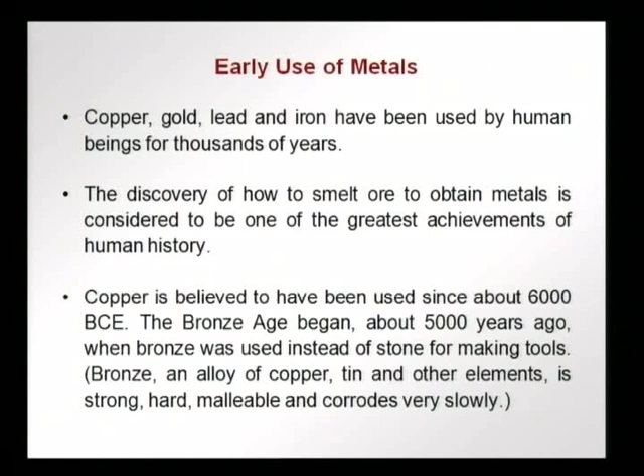Iron has been used since 4000 BCE, and we can say that the Iron Age even continues today with the widespread usage of iron and steel, and today we will see why iron and steel are so popular as construction materials and why they continue to be used. It is said that high quality steel was produced in South India perhaps as early as 300 BCE.

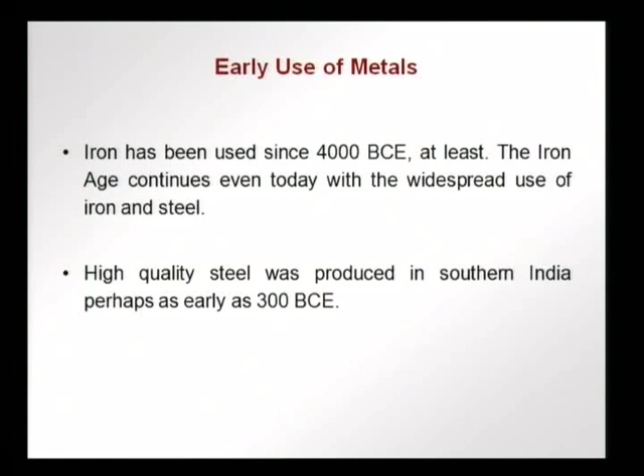Most metals are found in nature as ores, oxides, sulfides, carbonates, and though the extraction of the metal from the ore is based on simple chemistry, the problem is to do it on a large scale, on the industrial scale.

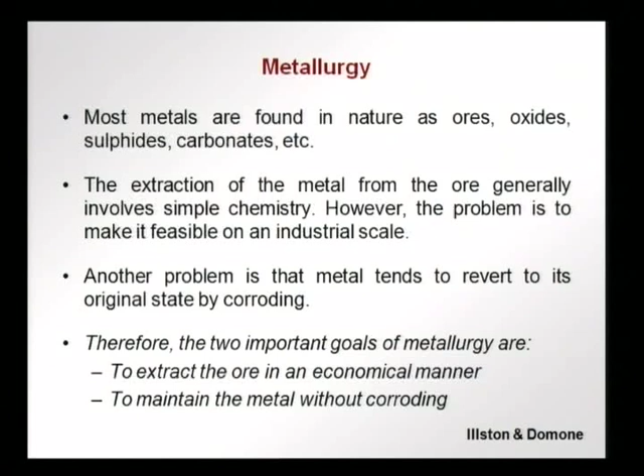Another problem with the usage of metals is that the metal tends to revert to its original state by corroding, that is, it becomes an oxide or tends to become an oxide. Therefore, in metallurgy the two important goals are how to extract the ore in an economical manner and how to maintain the metal without corroding, and the product of this is what we use in civil engineering applications.

This is a brief introduction to how metals are formed, common processing methods.

We have the melt, the molten metal, and this can be cast as an ingot, as a bulk piece of metal that can be worked on, shaped later, or it can be put directly into the shape that we want through sand casting where the mold is of sand, or some other material, or investment casting where we use a disposable mold.

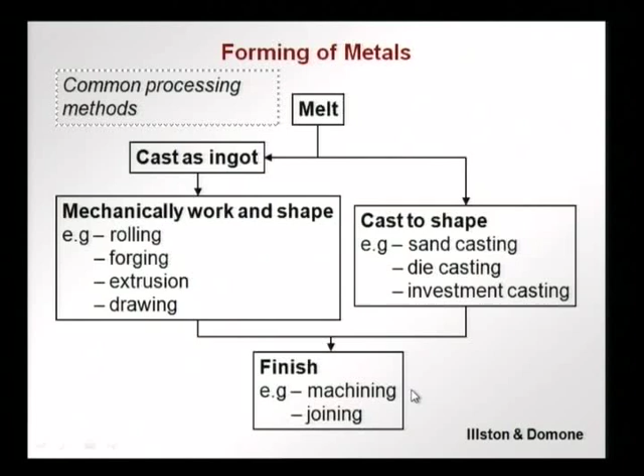This is also called lost wax casting and so on, where we use a die or a cast which is destroyed during the casting. Then the ingots can be worked and shaped through rolling, forging, extrusion, drawing. We will see this in more detail in a minute, and then there is a lot of finishing involved in terms of machining and joining of the different elements.

For forming, we use different processes related to hot working. The hot working processes depend on the plasticity, which is higher at higher temperatures, and this is done above the recrystallization temperature, so that when cooling occurs we do not have any residual stresses.

And these processes allow metals to be deformed in compression without breaking the metal. And on the right we see different processes involved. This is rolling. This is very commonly used to get sections, where a larger piece of the metal is pulled through rollers to get the desired shape and section.

The pulling through can also be done without rollers, using a die in the case of drawing wires and thin products. This drawing can be aided by a ram pushing the material through instead of just pulling through a die, and this is called extrusion. Then there is the possibility of applying force to create a certain section.

For example, in forging, force is used to give the material a certain section or shape. Deep drawing, again the material is clamped and there is a negative piece which gives the shape pushed against the metal to give the required shape, say to form a cup shaped element and so on.

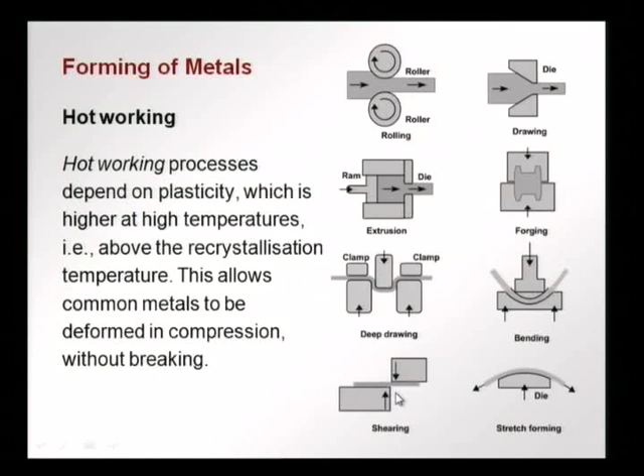For steel structural members, the usual method of forming is hot rolling with cylindrical or shaped rollers at temperatures of 1000 degrees or more. We use the higher temperatures so that recrystallization occurs and there are no residual stresses.

After rolling, the members are allowed to cool naturally, ending up with an annealed microstructure. We discussed annealing in detail when looking at strain hardening, and after annealing the material will not have residual stresses and will have a stable microstructure.

The cooling of the material to ambient temperature also involves the formation of an oxide film on the surface. When the material is hot, an oxide film forms and remains on the metal, and this generally helps the metal in terms of corrosion. The oxide can prevent further corrosion and stays on the surface.

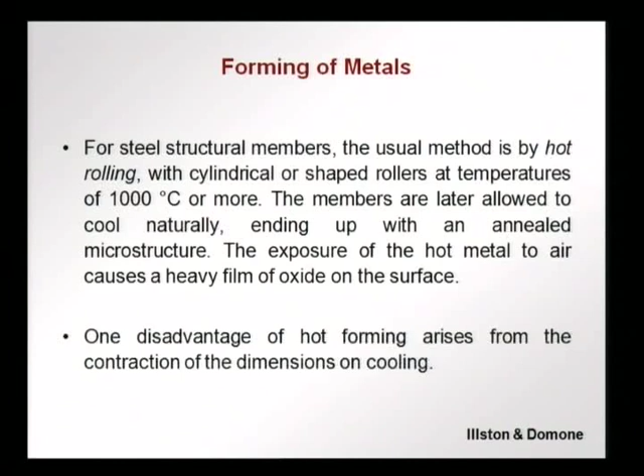Metals and alloys can also be cold worked. We have discussed the advantages and disadvantages of cold working in previous lectures. Here the metal is worked at temperatures below that of recrystallization, and there is not much change in the microstructure.

Many metals and alloys can be cold worked, that is shaped at temperatures below recrystallization, and this gives rise to strain hardening and an increase in tensile and yield strengths. This, however, as we saw in previous lectures, leads to a decrease in the ductility or elongation.

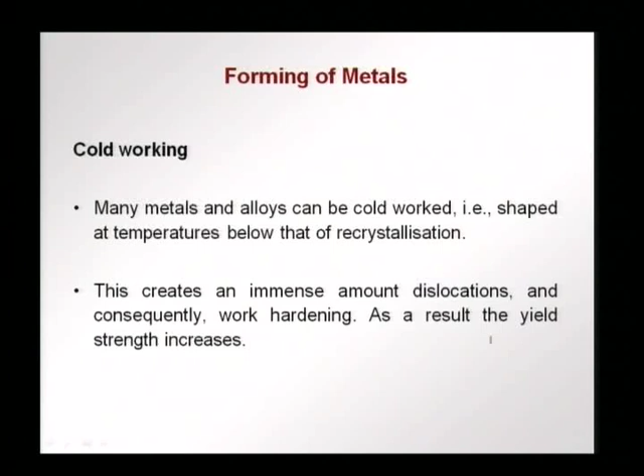This is caused by dislocation movement, and the dislocations result in piling up, with hindrances due to the grain boundaries causing work hardening. The consequence is that we now have a metal with a higher yield strength.

There are many cold working processes. Cold rolling, done at room temperature, is used to decrease dimensions, and this results in sheets that have higher yield strengths than the parent material.

Wires are also drawn at room temperature. This is called cold drawing. High strength wires are obtained, and fibers that are used in concrete are made with such processes.

Cold extrusion is also possible, similar to what we had in hot working. Extrusion can also be done in cold working, again leading to strain hardening and increase in the strengths.

There is, however, a limit to cold working. Beyond a certain limit, the ductility of the material is completely exhausted and the material fractures in the process of cold working. So we should understand the stress strain behavior in order to know how much to push the material into the strain hardening extremes.

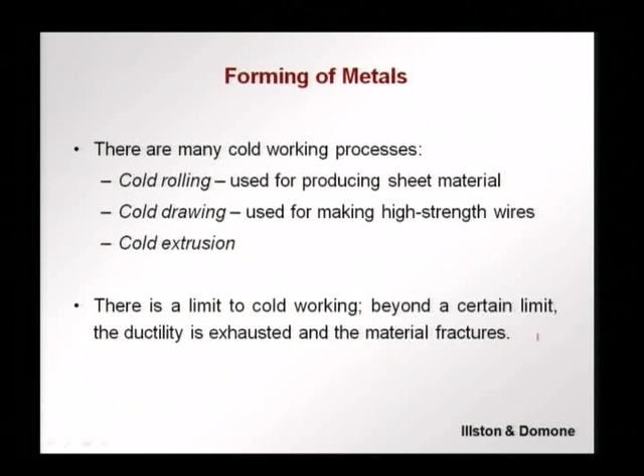There is a change in the microstructure of the materials also during cold working, depending on the process involved. Suppose we have cold working due to rolling, a polycrystalline material before rolling would have a microstructure with equiaxed grains, that is grains with similar dimensions in all directions.

However, if rolling is done, we now have elongated crystals, elongated in the direction of the rolling, and this microstructure remains after the cold working. The material changes from being isotropic to now anisotropic.

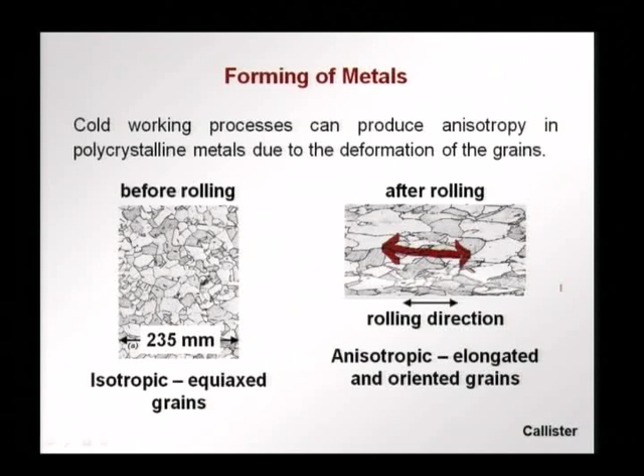Different pieces of metals also have to be joined before application, and there are several processes involved in joining metals. Adhesive bonding is where a substance like a glue is used to bond different pieces. This is being used increasingly, but is not very common.

Diffusion bonding is a solid state process we discussed earlier, where two pieces of metal are pushed together, temperature is applied, diffusion across the element boundaries occurs, and we have a case of an alloy forming near the bonded region, which sticks the elements together.

A common process of joining metals is welding, where the material is locally heated above the melting temperature, and the material fuses. Additional material can also be added, say a metal used to finish off the welding. The joint is then allowed to cool naturally.

This should be done such that there is complete continuity between the parts. This is often not achieved, and if not properly achieved, there could be defects which could lead to fracture and failure at the joint.

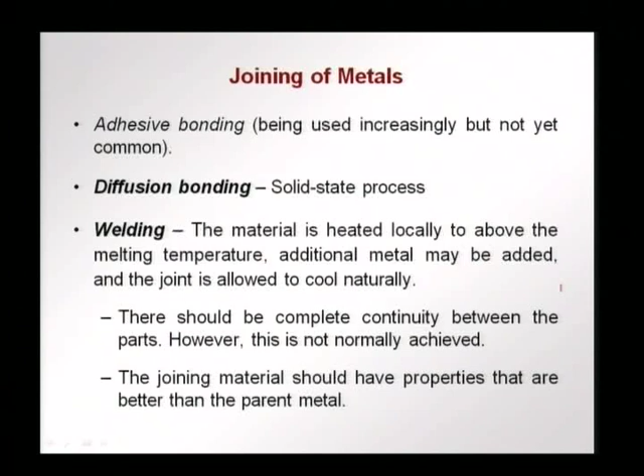The joining material, if an additional material is used, should have properties that are better than the parent material. Otherwise this would be the weak link and failure would occur again at the joint.

Brazing and soldering are similar to welding, but the temperature is lower than the melting temperature of the parent metal. This involves joining parts by means of a thin film of filler material. The temperature is lower than that of the parent material, however it is high enough for the filler material to melt. This flows into the joint and wets the joint through capillary action.

Remember, we talked about wetting when we discussed surface properties. The filler material should melt at a reasonably appropriate temperature, and when in the molten state, wet the joint by capillary action, then solidify with properties comparable to the parent metal. In soldering, the filler material melts at much lower temperatures than brazing filler materials, less than 450 degrees Celsius.

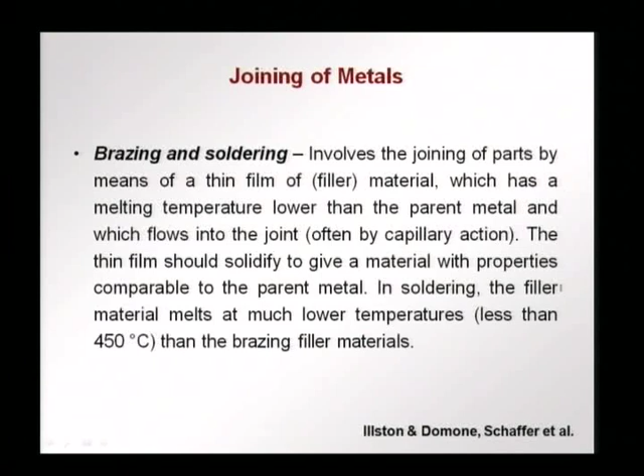One of the problems of using metals in applications is that metals tend to revert to their original state found in nature through oxidation. Oxidation and corrosion are very big problems in civil engineering, because this can hamper the life of the structure made out of metal. Corrosion can be divided into two parts: dry oxidation and wet corrosion.

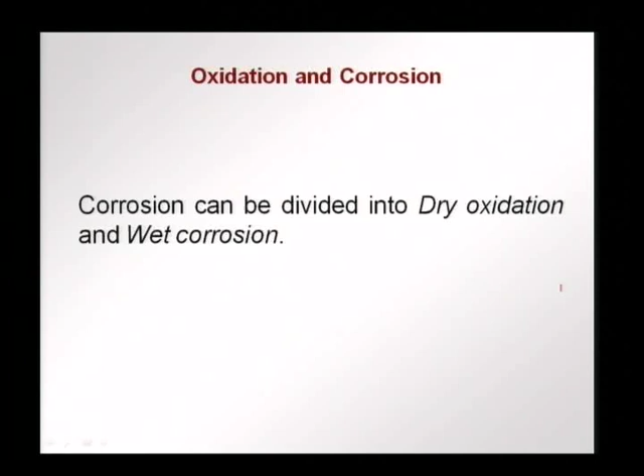All metals, as we discussed earlier, occur in nature in the oxidized state except for gold and silver. When a metal is exposed to the atmosphere, a thin layer of oxide first forms on the metal surface. Further oxidation depends on what can diffuse through this oxide layer - either metal ions should diffuse out through this first layer of oxide, or oxygen ions should diffuse in for oxidation to continue.

The rate of oxidation therefore depends on the thickness and structure of the oxide layer. If it is thicker, oxidation will be slower, and if the structure is very impermeable, not letting anything in or out, then again the rate of oxidation is lower.

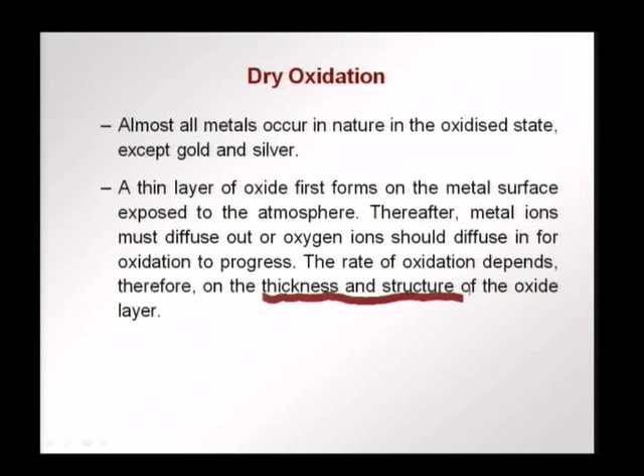When the oxide that forms has less volume than the metal itself, it shrinks and cracks. This exposes the fresh metal to oxygen, and further oxidation can continue to occur. Sometimes the oxide occupies more volume than the metal from which it formed, and then it will delaminate, stretch, wrinkle and fall off, again exposing fresh metal by creating a new surface.

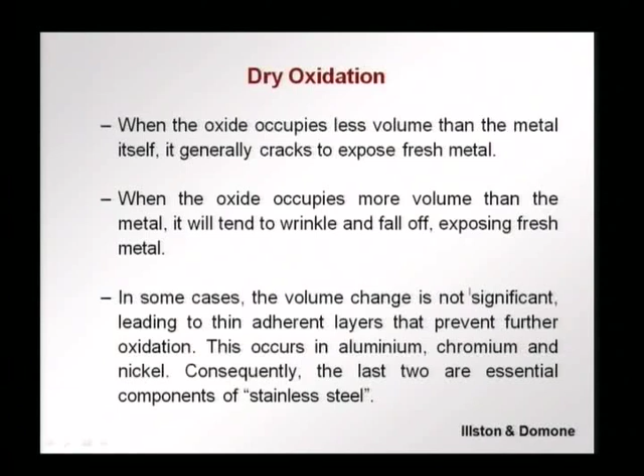In some metals, however, the volume does not change that much. This leads to thin adherent layers that stick on the original metal, preventing further oxidation. Such oxide layers form in aluminum, chromium and nickel, and this is the reason why chromium and nickel are used to make stainless steel.

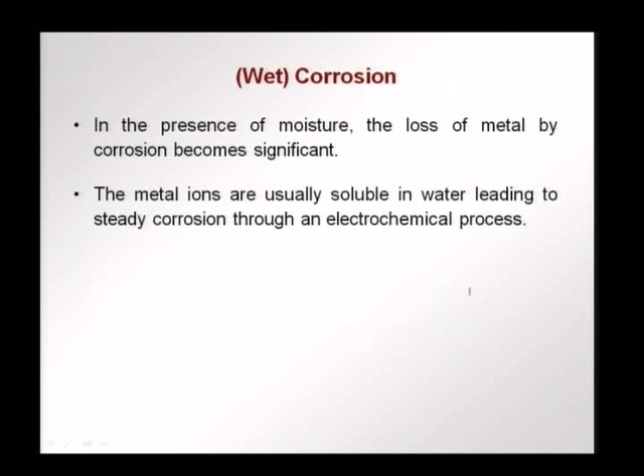In the presence of water and moisture, this corrosion process gets even worse. The loss of metal becomes more significant when we have moisture and water. Metal ions dissolve in water, leading to steady corrosion, and this occurs through an electrochemical process that we will discuss further in the following slides.

Let us consider a divalent metal M, with a valency of 2. What happens when you have an electrolyte and there is enough oxygen and water available? First, the metal releases electrons - this is the oxidation reaction or the anodic reaction. Then hydroxyl ions form from the oxygen and water - this is the reduction reaction.

So first we have an oxidation or anodic reaction producing electrons. Secondly, there is a reduction or cathodic reaction consuming these free electrons. These two are called half cell reactions. This occurs whenever a metal is exposed to both oxygen and moisture.

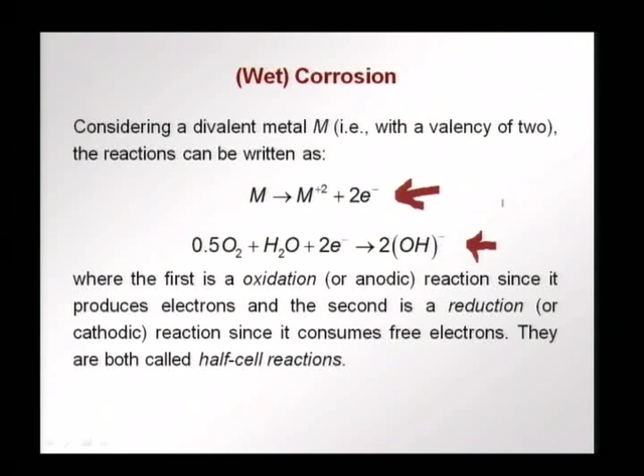In some cases, the metal ions react with the electrolyte and deposit away from the cathode. Iron is one which corrodes that way, and this involves two reactions. At the anode, iron releases electrons, which can result in a cation with a valency of 2 or 3.

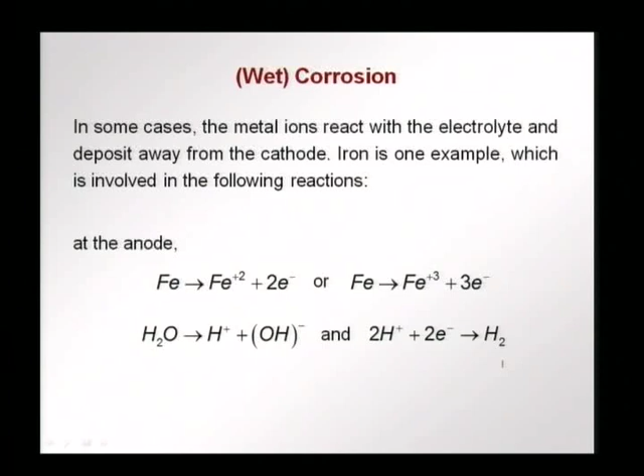Water splits up into hydrogen and hydroxyl ions, hydrogen is released, and at the cathode the iron ions react with the hydroxyl ions giving iron hydroxide, FeOH2 or FeOH3. This is what you would notice sometimes as an orange slimy substance found near iron that is submerged in water - you will see some orange liquid near the surface of the iron. That is iron hydroxide.

This is later converted to iron oxide and water as the water evaporates and the material dries. You have rust forming on the surface, that is iron oxide.

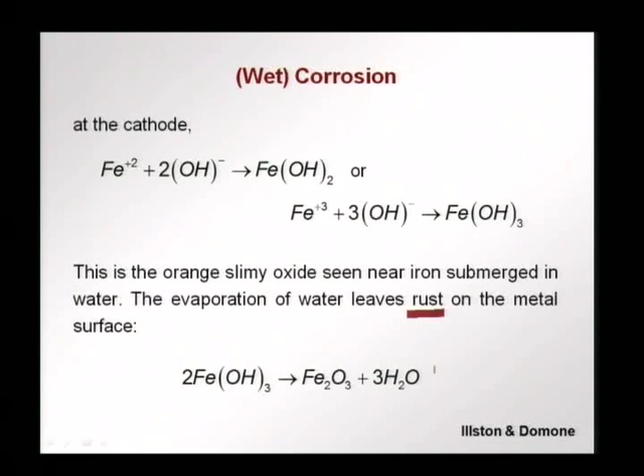This is a diagram showing the different reactions that we have discussed. We have an anodic reaction that is now causing the loss of material. Iron ions now dissolve in the electrolyte, there is a release of electrons, and at the cathode we have hydroxyl ions being produced.

Oxygen and water are required for this cathodic reaction. This now results in depletion of material at the anode. The material starts to be removed at the anode and deposited elsewhere, say near the cathode.

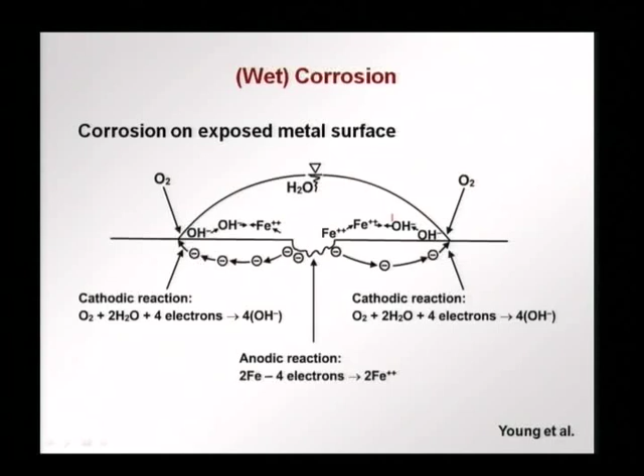Corrosion can also occur when two dissimilar metals are in electrical contact. Electrical contact does not necessarily mean that they are touching each other, but they could have an electrolyte connecting them. Say here we have a piece of iron and a piece of copper in a bath which could be water with some impurities or some salt solution.

So what happens now is that the copper electrode becomes a cathode, the iron electrode becomes an anode. So the iron piece starts losing material, iron ions now go into solution, and we have a cell formed between the iron and the copper pieces, and this is called a galvanic cell. This is very important because in many applications we have dissimilar metals in contact, and this could mean that one of them will preferentially corrode because of this galvanic cell.

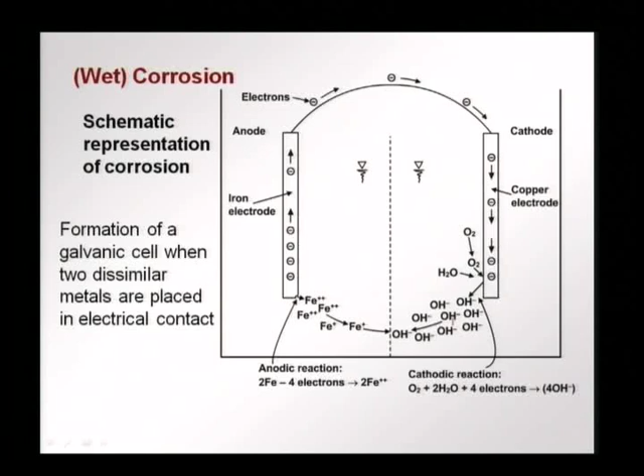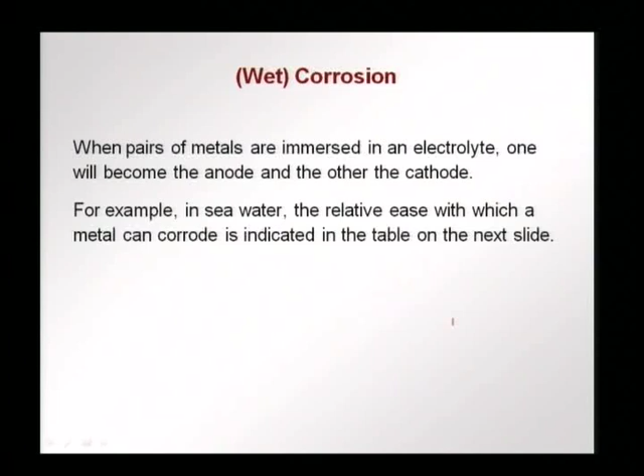So when pairs of metals are immersed in an electrolyte, wherever there is some sort of solution, one will become the anode and the other will become the cathode, and the anode will corrode. We look at the example of metals in seawater, and we can make a table which shows which will corrode more with respect to another. This is called the galvanic series.

Later on we will see that this is used to create sacrificial anodes when we want to protect steel, say mild steel, from corroding. If we have a piece of magnesium with it, then the magnesium or zinc would corrode rather than the mild steel. We also find that in an alloy, say in brass, when we have more zinc, the corrosion potential is more than in brass which has less zinc.

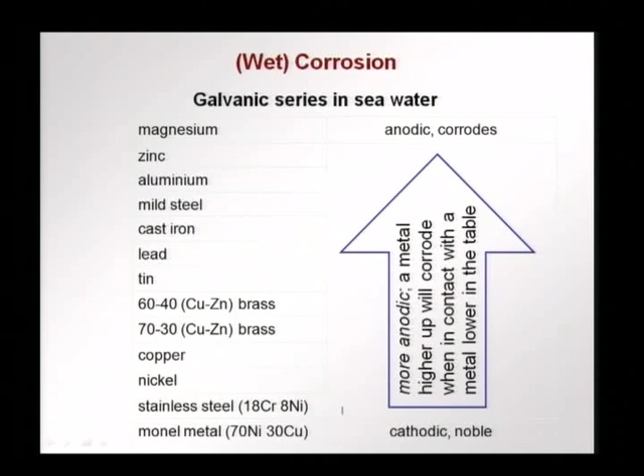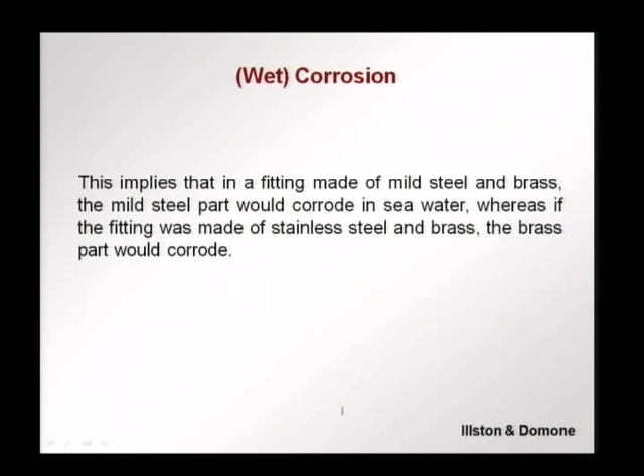So as I said, this table means that when we have materials in contact, say mild steel and brass, the mild steel would corrode faster than brass. However, if we had something of stainless steel and brass, then the brass would preferentially corrode because it is higher up in the series or in the table.

The process of wet corrosion also can tell us how we can design materials or design components such that corrosion is prevented. We see that when the composition of an electrolyte changes, that is, the concentration of dissolved oxygen changes in the electrolyte, this can cause preferential corrosion.

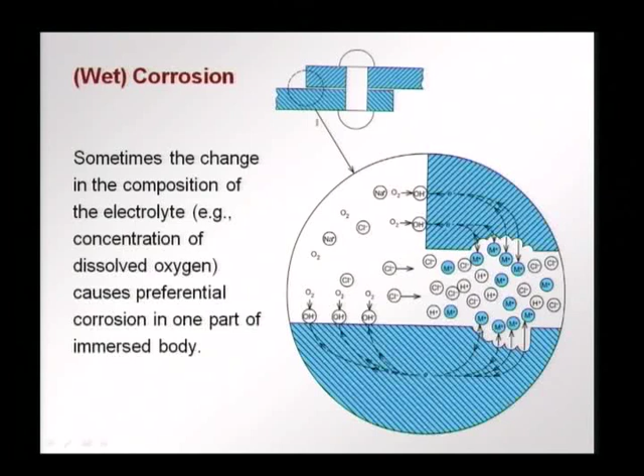This dependence on the amount of oxygen in the electrolyte gives rise to significant issues when we want to protect materials against corrosion. In a riveted or bolted junction that we saw, areas that are inaccessible for inspection as well as oxygen will become anodic and corrode, since the electrolyte there is poorer in dissolved oxygen.

This also we see in pitting corrosion. The bottom of the pit is further away from the surface and therefore it gets less oxygen. This region is poorer in oxygen and therefore becomes anodic. The consequence is now that the pit becomes deeper and deeper, leading to premature failure, which happens because in an inspection we see only the top surface, we do not see the depth of the pit, and the depth of the pit could reduce the section and cause a defect to be formed, which can become a crack later.

Similarly, we find in sheet piling with steel in stagnant water, the surface layers are richer in oxygen, whereas the lower layers are oxygen deficient. So what we find is at the top we need not see any corrosion occurring, but just below the surface, not very much below, but where you have lesser oxygen, the layer of steel becomes anodic and starts to corrode locally. So again this requires inspection and proper design such that areas which could get less oxygen are protected against corrosion and inspected periodically.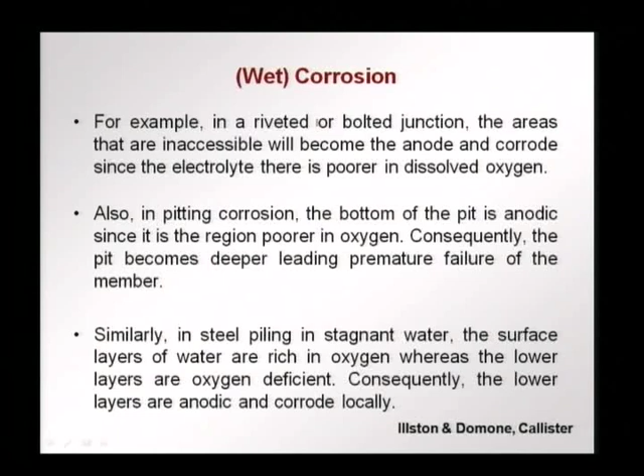Now, corrosion becomes worse when stress is applied, and this is normally the case in most civil engineering applications. You would have a metal having some sort of load or stress. This gives rise to what is called stress corrosion and consequently stress corrosion cracking. This results from the combined action of tensile stresses and a corrosive environment.

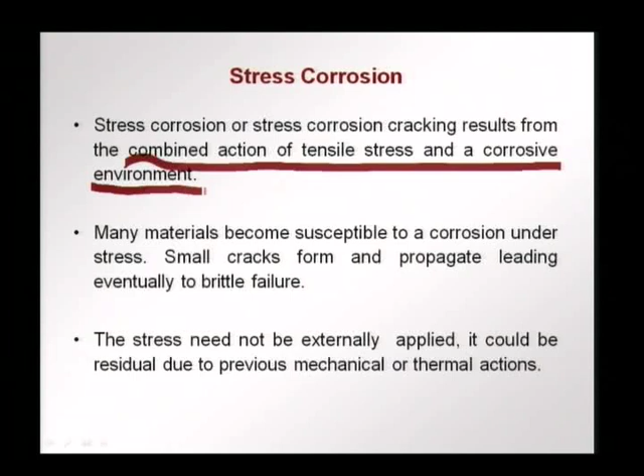Most materials become susceptible to corrosion under stress. Small cracks form and these propagate, eventually leading to brittle failure. Sometimes a stress or a load may not be necessary, just the residual stresses due to previous mechanical actions like strain hardening, cold working, or thermal actions, thermal fatigue, cycling of temperature can provide enough stress to cause corrosion. And this is one reason we have higher corrosion possibility in strain hardened materials, because you have grains now which have higher energy.

They have surfaces which have higher energy and therefore can corrode faster. In brass, this is how stress corrosion would look like. You see the grains, the small grains, this is a polycrystalline material, and at the surface now we have surface of the grains, we have areas of higher energy, these are surface defects that we had discussed before, and when this material has some stress along with a corrosive environment, the crack starts to go along the grains through the grain boundaries, causing crack propagation and ultimately failure.

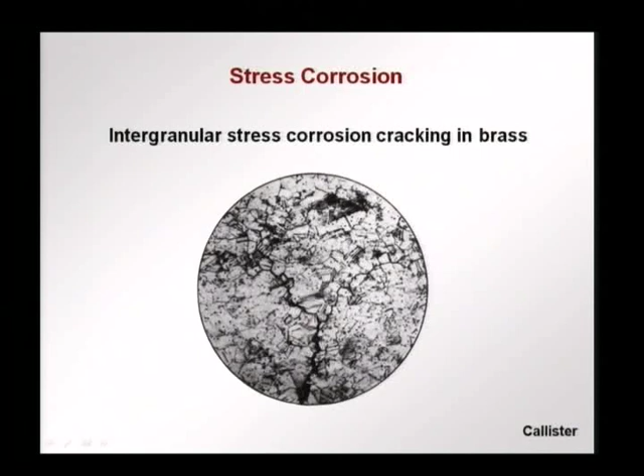So this occurs due to the combination of the stress which is accentuated at the defects along with the penetration of corrosive material in the crack, leading to further crack propagation and failure.

There are several strategies or needs for minimizing damage. Some are easy to apply, some are more in the design phase, and others in the operation and maintenance phases.

First of all, we should try to reduce the operating temperature. This decreases the rate of corrosion. This is not always possible. We might not be able to change the operating temperature, but if we can insulate, we can decrease the temperature at which the material is in, then we will reduce the rate of corrosion.

We can also choose the right material. Slight changes in composition can improve corrosion resistance. For example, elements that produce protective oxide films, like we had discussed before, chromium, nickel, titanium, can be incorporated in a metal to increase the corrosion resistance. So this affects the choice of the material to be used in a certain application.

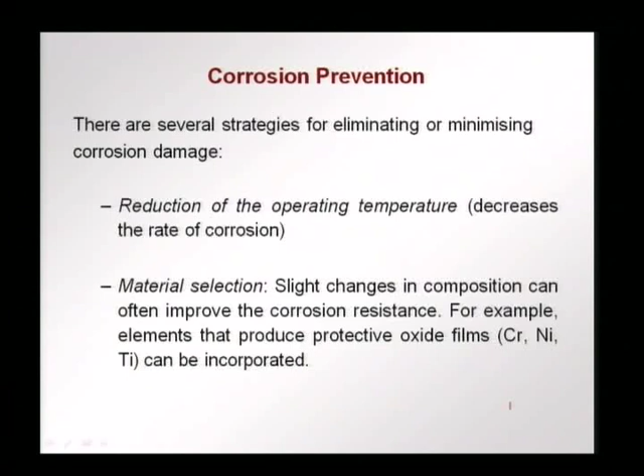We can look at design modifications, avoid heterogeneity, prevent contact between dissimilar metals, for example steel and copper. So this again comes from the elimination of galvanic cells between the two dissimilar materials, which will cause corrosion of the more anodic material. For example, if we have steel and copper in contact, steel will corrode. So this is something that we can keep in mind during design to avoid dissimilar materials from being in contact.

Secondly, we should avoid any stagnation of liquid, water in the application, by minimizing sharp corners, depressions, connections where water can stagnate and not dry off. If we keep a material dry, then the possibility of corrosion is also less. Other than this, we can take active precautions to reduce or eliminate corrosion. This is in the form of cathodic protection, protective coatings, and the use of corrosion inhibitors. So this we will look at in more detail.

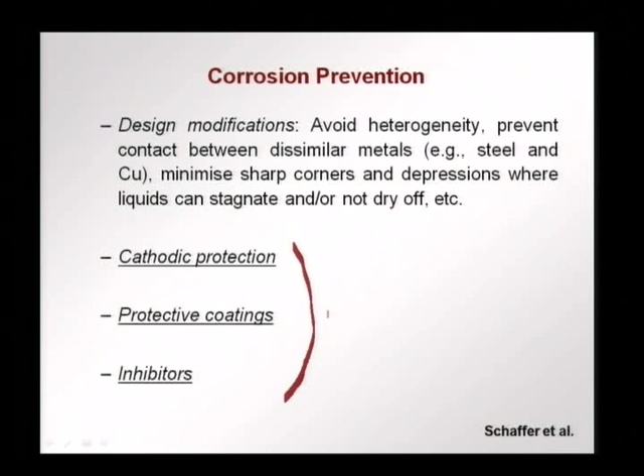Cathodic protection is based on the reversal of the direction of the metal oxidation reaction. That is, the metal that we want to protect, the metal that we want to not corrode, we force it to become the cathode. We ensure that this metal does not become an anode. We know that corrosion is an electrochemical process.

So, a common way to provide cathodic protection is to use an electric current to supply extra electrons. The metal piece that is to be protected is connected to the negative terminal of a battery, and a scrap anodic metal is connected to the positive terminal. So, we use this scrap anode to sacrifice it and therefore protect the metal that we want to keep for a long time. This scrap anode has to be periodically replaced as it will be consumed over a period of time. So, we need now a battery or a power source plus a sacrificial anode for this system to work.

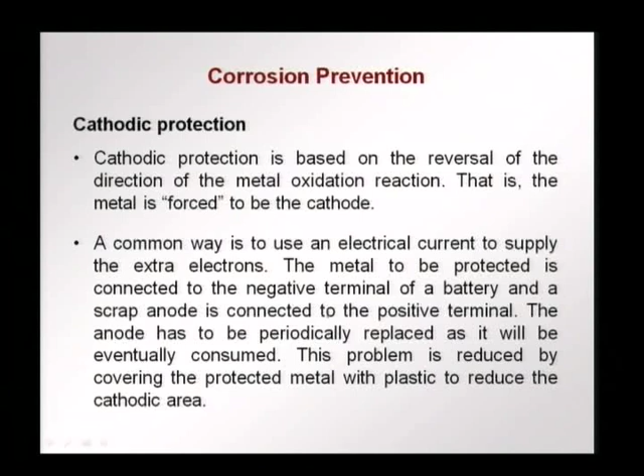We can further help the process by covering the protected metal with plastic or some coating, so that the cathodic area is reduced, and this has to be done in periodic locations, so that the complete element is protected.

Suppose we have a pipe under the ground and we want to ensure that this metallic pipe does not corrode. So, we force this pipe to be a cathode through the use of a battery. The battery now is connected to an anode which is losing electrons. This is some scrap metal that we can continue to replace. This is nearer the surface, we will excavate and keep changing this anode. Now, we have to have several batteries along this pipe at periodic locations to ensure that the complete pipe is protected.

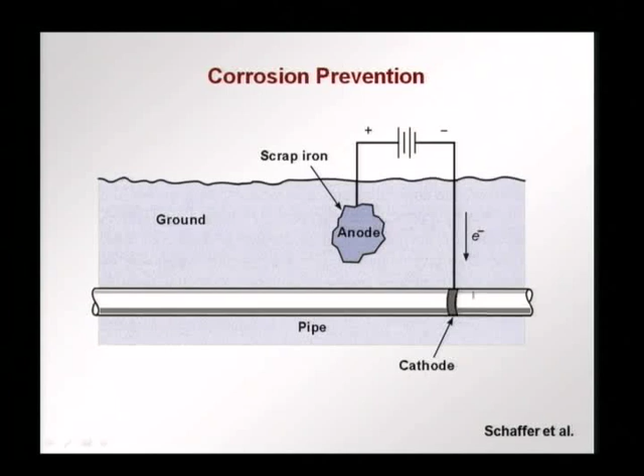Additionally, we coat the pipe with an adequate coating, say a plastic coating, to ensure that the exposed area is reduced. So, this is how cathodic protection is done.

Alternatively, what we can have is go to our galvanic table and choose a metal which is more anodic and make that the sacrificial anode, and in this case we do not have a battery, we do not need the battery to provide the electrons. What we do is we ensure that there is contact between a metal that is more anodic than the metal that we want to protect. So, this metal that we want to protect will become cathodic, the anodic material will corrode and sacrifice itself.

So, often what is done is, to protect steel we will have pieces of zinc or magnesium placed in contact at again a periodical distance, so that this zinc or magnesium will corrode and protect the cathodic material from corroding. So, when you have large areas we have to have many of these sacrificial anodes, and these anodes have to be replaced often. So, this is an alternative to having a battery that is giving the cathodic protection.

Sometimes we have that even in reinforced concrete, to protect the reinforcement we embed these sacrificial anodes in the cover, so that they can be sacrificed and protect the reinforcement, which if it corrodes can lead to failure. Sacrificial anodes are widely used in marine environments, especially in ships, offshore platforms. It is systematic to put pieces of zinc or magnesium in contact with the steel, so that they can corrode, and they are periodically replaced and protect the steel in the application that we want.

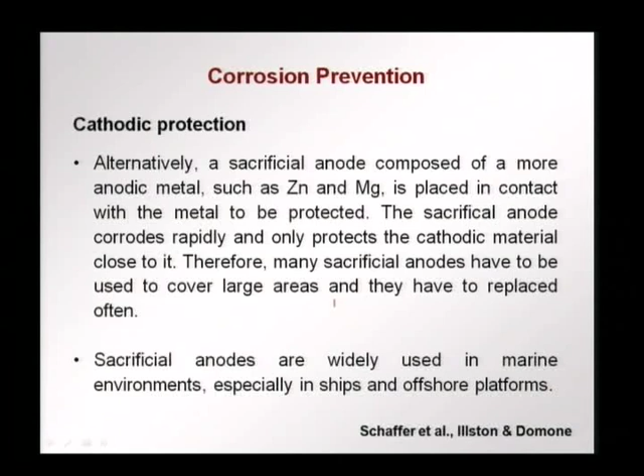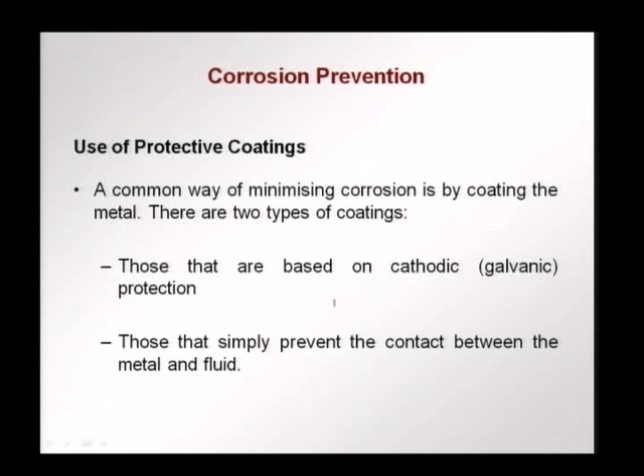A second way of active protection is the use of protective coatings. There are two types of coatings: a coating that could be cathodic, that is it provides galvanic protection using a material that is more anodic. So, we know that this coating will sacrifice itself and protect the main material, or it could be a coating which simply becomes an impermeable layer that prevents contact between the external fluid and the metal.

So, in the first case we use anodic metal coatings to protect, say, steel. We have lots of applications, we have zinc coated steel in use. The zinc coating protects the steel even after the coating may be scratched, because the zinc will corrode rather than the steel corroding.

Chromium plating is also used many times, but that will not protect the steel much, because chromium is more cathodic than steel. What happens is when corrosion starts, a small pit appears in the coating, and underneath it the steel can corrode, but you will not see this corrosion occurring because the chromium plating is at the top. Eventually you will find corrosion has been occurring and there is a loss of material. So chromium plating, though used a lot, is not a good way to provide cathodic protection.

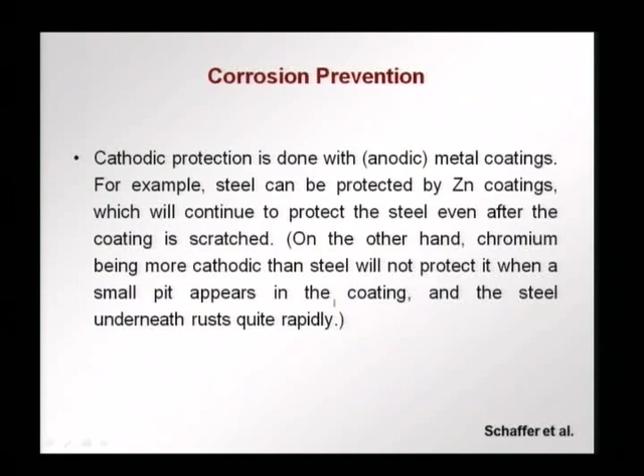Zinc coatings have been used for a long time and they are very efficient in giving cathodic protection. You also have non-cathodic coatings such as epoxies, enamels, bitumen, Teflon, paints, and lacquers, which are used to protect metals. These basically give an impermeable layer on the metal, limiting the diffusion of oxygen and water through the protective layer to the steel we want to protect.

However, a major problem is what are called pinholes or holidays, meaning there is a discontinuity in the layer. Small areas of the coating could be accidentally exposed due to a scratch or someone cutting something accidentally, resulting in exposure of the base metal. This results in the formation of a corrosion cell with a high anode to cathode area ratio. There is a large area not exposed to oxygen, which can become the anode, and a small exposed area which can become the cathode. So there is a high anode-cathode ratio, and a corrosion cell can form there.

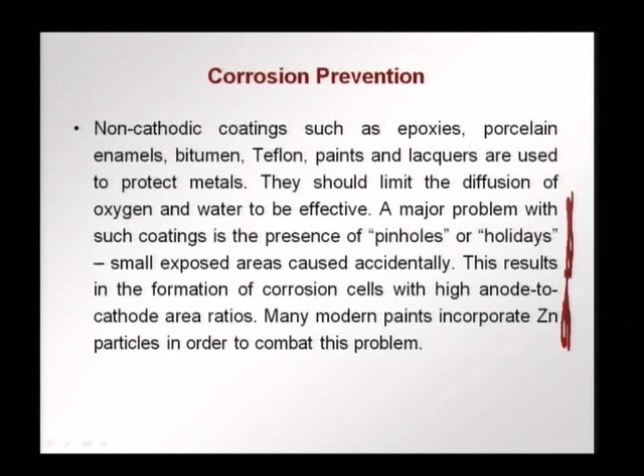One way to make this coating better is to have particles such as zinc in the paint we use, so that if there is a pinhole or holiday, the zinc will corrode rather than the base steel corroding.

Passive oxide layers can also protect. Recall that some oxide layers do not have much volume change. They stick to the surface of the metal and will not allow oxygen to go through or the metal to diffuse out. This can be enhanced further by a process called anodizing, where we purposefully increase the thickness of the oxide layer by applying a high corrosion potential, giving rise to a thicker than normal oxide layer. This oxide layer now protects the anodized metal from further corrosion in application. So this becomes part of the processing itself - we purposely increase the oxidation layer by anodizing, and this prevents further corrosion from occurring.

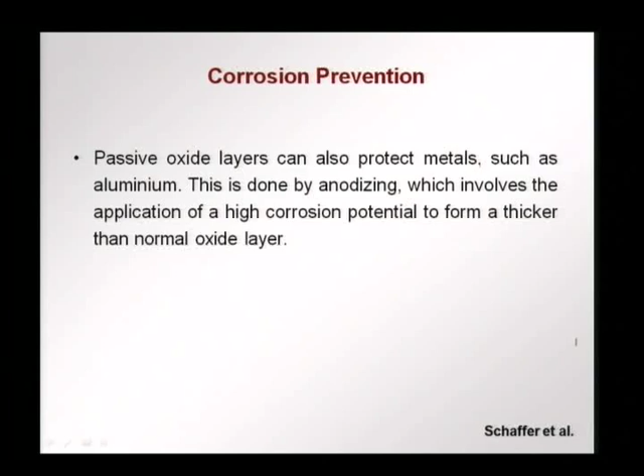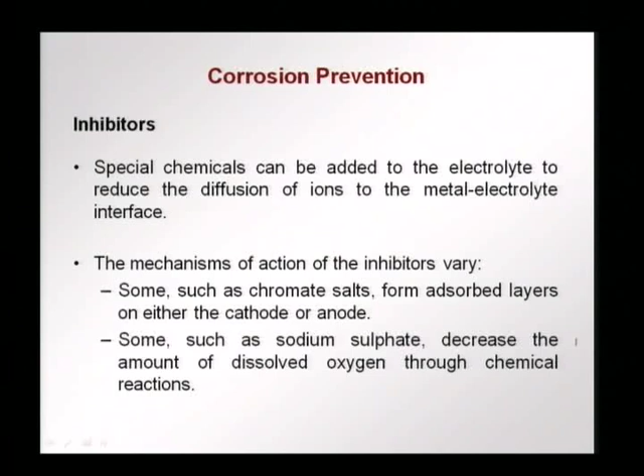A final way of looking at corrosion protection is through inhibitors, where we add special chemicals to the electrolyte, not to the metal, to decrease the diffusion of ions to the metal-electrolyte interface. The inhibitor may act by forming an adsorbed layer on either the cathode or anode, such as in chromate salts, or like in the case of sodium sulphate, we can have less dissolved oxygen in the electrolyte. As we know, we need oxygen and water for corrosion to occur, so if we cut the supply of oxygen, we have less corrosion.

The use of inhibitors is limited, because we cannot go anywhere and put this inhibitor in all applications. Inhibitors are used a lot in closed applications, where you have, say, a tank recycling some liquid, or any other closed space where solution is always in contact with the metal. One application is in reinforced concrete, where corrosion inhibitors are added to the concrete such that they can get into the pore solution and prevent corrosion of the reinforcement.

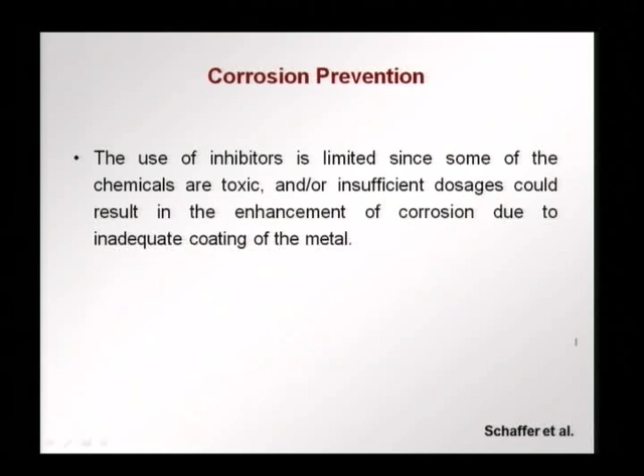Some limitations in the use of inhibitors are that the chemicals are toxic, some of them at least, and therefore we cannot have them in contact with people. Secondly, if you have an insufficient dosage, not enough for the exact type of corrosion occurring, the corrosion can be enhanced due to inadequate coating, and we will believe the corrosion is going to be inhibited when it will not. So these are tricky aspects related to the use of inhibitors, and therefore there are limitations on where they can be used.

So to conclude this part, we have looked at how metals are formed. We went through hot working and cold working, and then looked at something very important: corrosion and oxidation. This often prevents metals from being used in some applications, increases maintenance cost, and can also lead to failure. So failure can happen not only because of loads and stresses applied, but also due to corrosion from the environment the application is in. We will continue in the next lecture, where we will look at different types of metals used, starting with iron and steel and going on to other metals. Thank you.